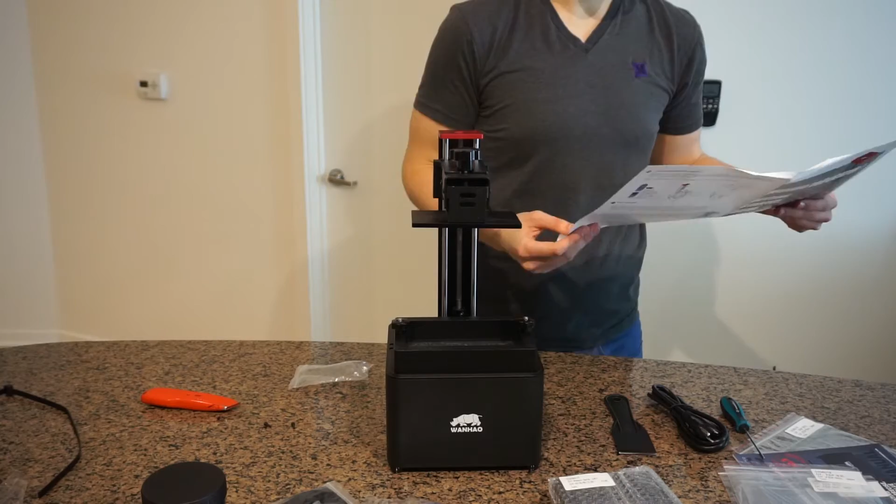Comes together very quickly in terms of the mechanics. Just checking over the manual, making sure I didn't miss anything and all parts were included. And the lid just fits on nicely, and I think it looks great.

One thing you need to know about these printers: they are messy, messy, messy.

So do yourself a favor and lay down some plastic on whatever surface you're about to work on. I'm just going to be using a trash bag over the top of my desk as a temporary fix for today, since I'm doing the video recording, but it'll save us down the line. A lot of mess can happen.

So I'm going to take my printer, put it on the plastic, and then we're going to start plugging in the cords, starting off with the HDMI cord. It is a display that's on the printer, which needs its signal sent to it through the HDMI from your computer.

Up next will be the power cord. You gotta have power. And then something that's not being shown is also the USB cable. Didn't plug that in here, but you also have it connected to your computer via USB, which is a USB B to A cord, provided with the printer. I'll take off the lid, set that off to the side so we can do all the work we need with the internals.

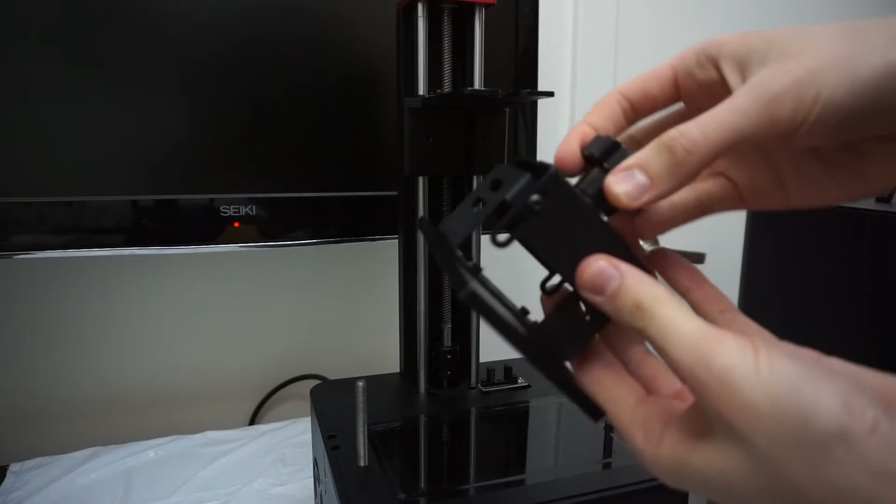Now we're going to start attaching our pieces, such as the build plate, which we are going to hook on to the printer's Z gantry, making sure there's a gap between the thumb screw and the build plate. That just slides into place and gets tightened down, making sure it's all the way back.

Up next, we're going to be getting the resin vat — this hunk of metal that has a plastic sheet attached to the bottom called FEP film. I'm going to first clean that off using isopropyl alcohol. We don't want any smudges on here at all. We want to make sure that it is spotless.

So I'm going to take my time, use a few different shop towel rags, and wipe it down really well. Once that is clean, I'm also going to take a second to wipe down the LCD display screen, just to make sure that there's nothing left behind there before I sandwich them together.

The vat just goes straight down onto these two threaded rods sticking up from the printer, and with two small thumb screws, it gets tightened down. We don't want to make it too tight — we could risk cracking the LCD screen — just snug, so that it's not going to wiggle around on us. Perfect.

Alright, so to get our life in order and get this printer set up, we're going to need to get our software together. Now you would think you would go to wanhao3dprinter.com and be able to download whatever slicing software you need for it. That's not the case, necessarily.

On the website, when you find your way and navigate to the product support for Wanhao Duplicator 7, you will find USB drivers to download if you have issues with your computer connecting. If you already have other drivers installed, say from working with Arduinos in the past, you don't need to worry about it, but you can find it here on the Wanhao website.

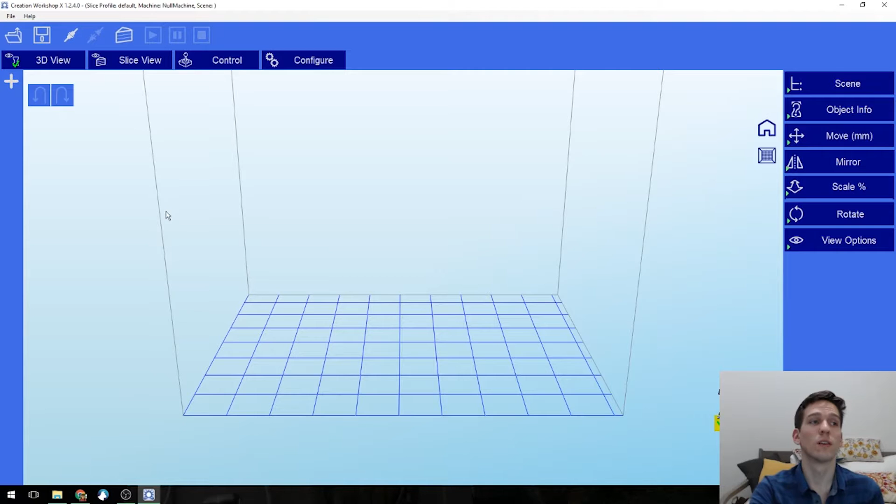And lo and behold, we have a beautiful Creation Workshop screen. We've got the build volume here. I believe it's already set the defaults for what the Wanhao printer is, but we'll need to go through a couple things to get this up and running.

Going over the configure settings, we are going to set up our printer with a new printer profile. I'm going to name this one D7 setup video since I'm creating it for the purpose of this video, but you can name yours whatever you want. There's a few different things that we'll need to set up in here. One thing is knowing that as I edit, I need to go back and make sure that I am in fact editing the one that I want to edit. And here we have a few things to adjust.

First, I need to configure what port my printer is connected to. In this case, it is communication port 4 that I know my printer is selected on. We do not need to control an X and Y axis. We do need a Z axis. We don't have any tilt controls or extruders or heated platforms to worry about. I do like to be able to control whether the motor is on or off. Entering manual G-code and controlling the projector are all things we want to keep.

Apply those changes. And whenever I do that, it's telling me I need to configure at least one display device. What that means is over here, it lists the two displays on my computer: display 1, which is the monitor that I'm working off of right now, and display 2, which is what the printer shows up as when it's connected through the HDMI port on my computer.

So to make sure that is set up, we're going to go to our display settings on our operating system. I'm looking at my first monitor - that's fine and dandy, that's still the same default, that's my main display. I'm going to go to number 2 and make sure this is set up where the resolution is maxed out at 2560 by 1440.

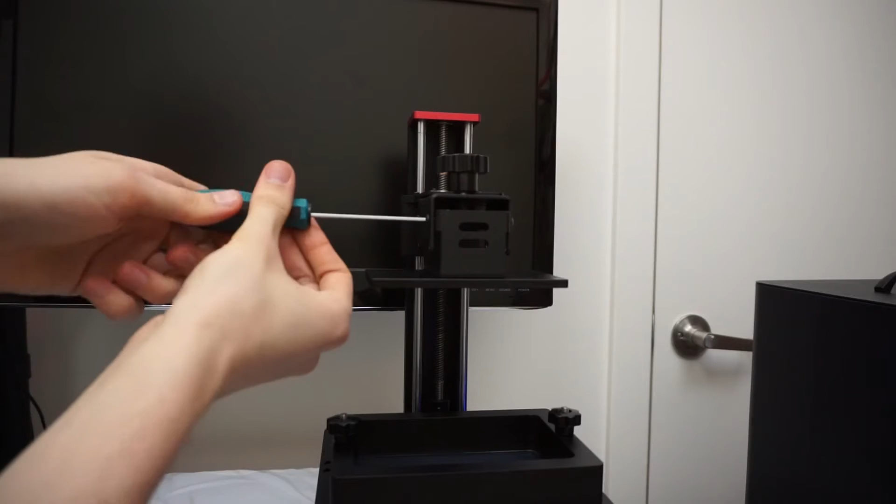Up next is making sure that our Z plate, our build plate, is homed to the proper position. Using the Allen wrench tool that came with the printer, I'm going to loosen all 4 screws that you would find on the gantry. This is going to allow the build plate to freely hang off of the Z gantry, so once I lower it down, it's going to get into position nicely since it's loosely hanging right now.

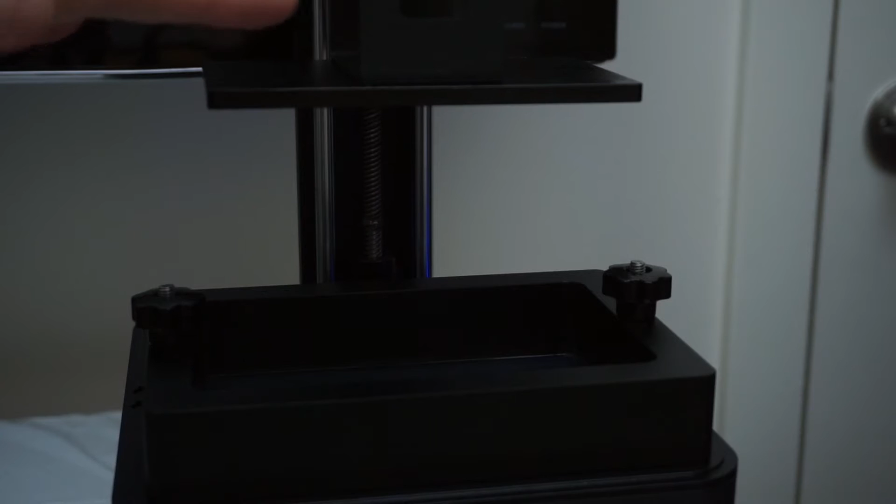So once it is loosened, I can come back to our Creation Workshop and hit the homing Z button right here, which will cause our printer's Z-axis to drop down until it meets the optical end stop point. Now with the printer going down on the Z-axis, it's going to bring the gantry to the 0 position, and with the loose build plate, it's going to make sure that it's sitting flat and level with the FEP film, and therefore also with the LCD display.

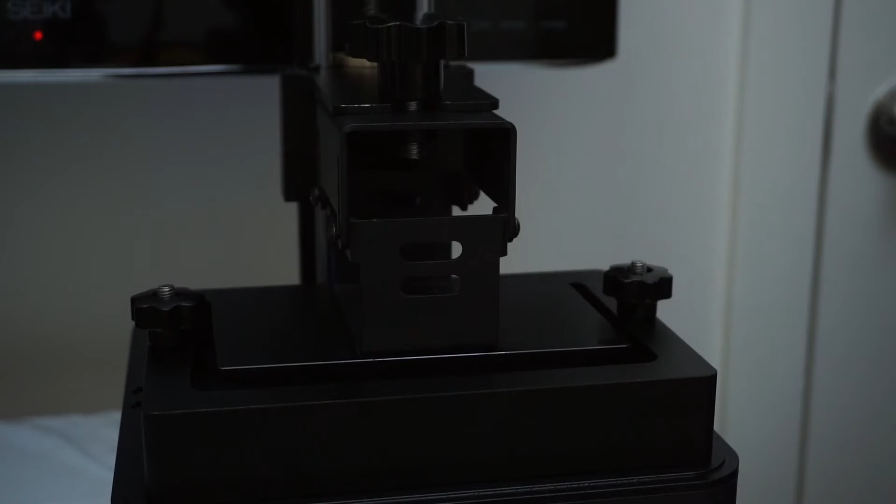Once it's lowered, I'm going to use the same Allen tool to tighten all of the screws, keeping some pressure with my fingers, pushing it down, making sure that it's flat and level with that build plate, just making sure everything's snug again.

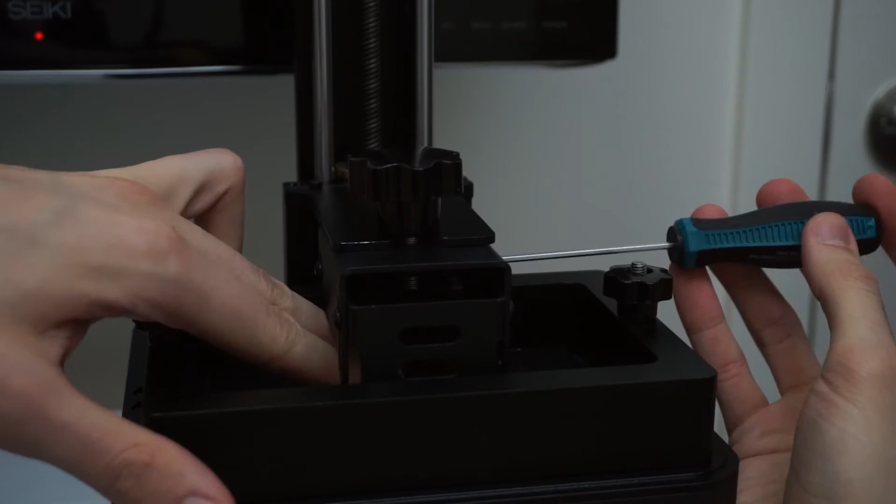So up next, before we get all gung-ho about pouring in resin and trying to get a model sliced and printing, we want to make sure that our printer works. To do that, we're going to use a couple G-code commands to make sure that our LED that's inside, our UV LED, that's the big powerhouse of the whole printer, is working.

To do that, we're going to be in Creation Workshop, making sure our printer is still connected, turning on manual G-code commands, and then there's really 4 G-code commands to worry about here. First, I'm going to turn on the internal cooling fan using the code M106 S255. What that's saying is it's going to start up the fan at 255, which is the maximum value you can set. I believe that has something to do with pulse width modulation commands that get sent to the fan - don't quote me on that. But we're going to send that, and it's going to turn on our fan printer.

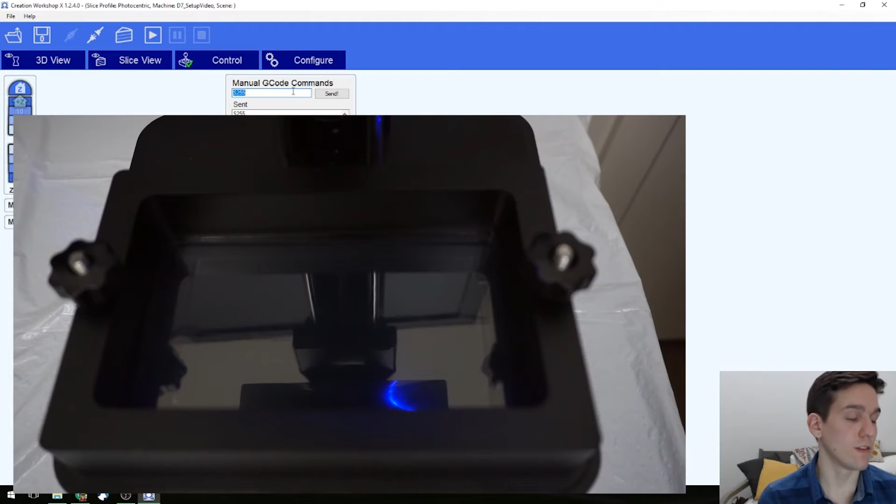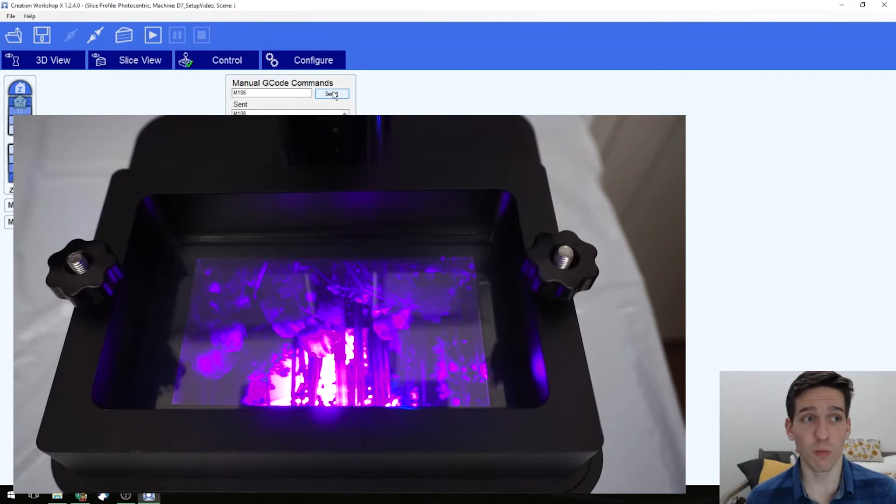With that on, I can then feel comfortable enough to turn on our LED by typing M106. That now turns on our LCD display. Now with nothing sent to this display, it is acting just as if there is a second screen on the printer, showing what the desktop of my second monitor would normally look like.

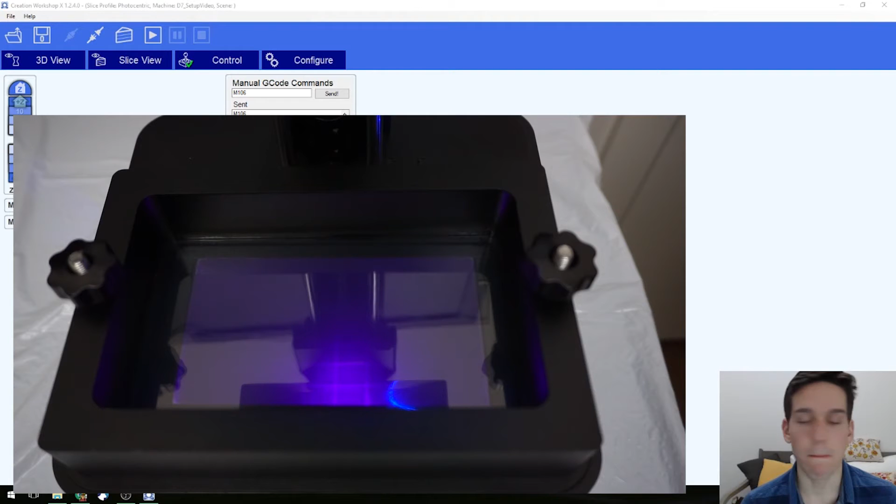There are a couple commands you can put in within Creation Workshop. Here I can show blank, which blacks out everything on the display, or I can show calibration, which might be too faint to see on camera, but there will be a small grid that shows up. Yep, we can see some parts of the grid showing up. It's very faint, but that allows you to see the grid lines of the print as it's going, and this tells me that it is working.

I can hide it, just show it like a normal display, or show blank. I know the LED is working, and now we want to turn it off. So we're going to hit M107 to turn off our light, and then we can turn off the fan as well by setting it to a power level of 0 with S0. Simple G-code commands, pretty much the only ones you'll need to worry about since we have the other controls within Creation Workshop, just to test our light before we start pouring in resin.

So let's get to that now. Let's pour some resin. I'm going to be using Photocentric Hard Red UV resin. I ran out of the Wanhao gray that came with my printer, so I only have this around, and it came in a bundle with my printer.

But before I get started, I'm going to first protect my hands. This stuff is nasty, it can irritate your skin, so I'm going to put on gloves, nitrile or latex, and make sure it's powder-free. I'm going to get those on before I ever handle anything with the resin. Once I'm back to using this printer regularly, pretty much everything around it gets resin on it at some point, and it becomes sticky and gets on your hands. It makes them smell, it's not great. So just wear gloves.

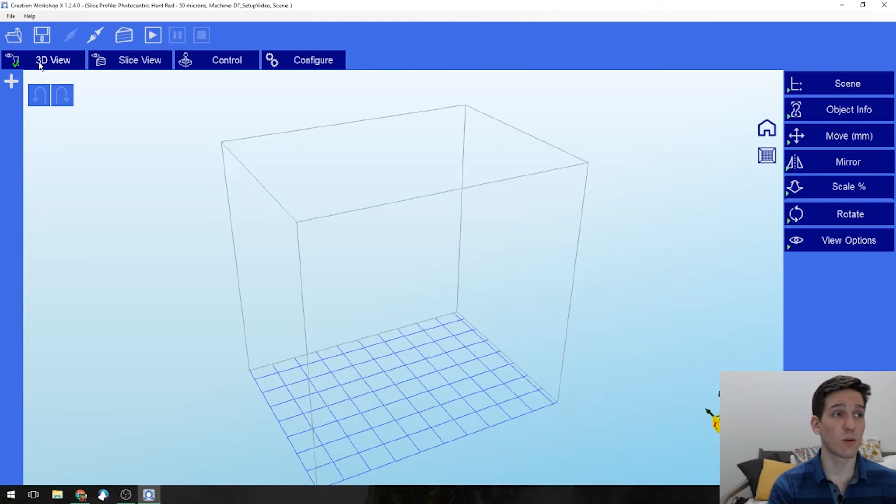To find that part, we're going to go to Thingiverse for a wonderful calibration piece. We just search for SLA test model, it should pop up - boom, first one right here. This SLA test model has all these intricate details that let us really see the capability of this printer. It has very small details that print on the top, so we can see how it builds up layers. It also has very narrow structures that allow us to see how delicate of pieces it can create.

These sections show you how much gap you can get between two pieces, in terms of if you're trying to have a part that prints in place or something like that. You can get an idea of what your spacing needs to be before the two sides fuse together due to over curing, which is what we want to limit.

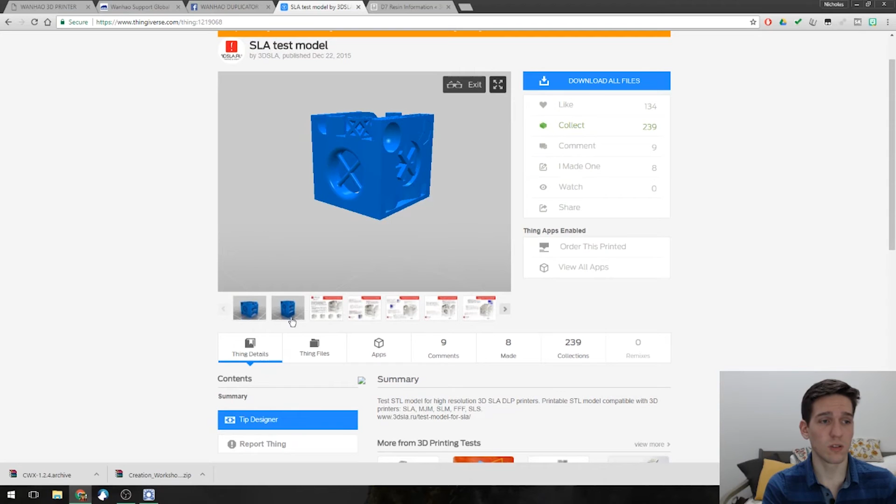Also, you have the whole cube itself, as well as some other random pieces to check for dimensional accuracy, so it's a great model. That's what we're going to use. It also has one listed that has support pieces already built into the model, which is what we're going to use, so we don't have to worry about the bottom of the model having issues when we first do our print. So we're going to download this.

We will come back to our workshop and open up this file from our downloads folder, and it's small. That's another nice thing about this part, is it's small, so it doesn't take too long to print. All right, so we have this here, and then all we need to do is tell it to slice it.

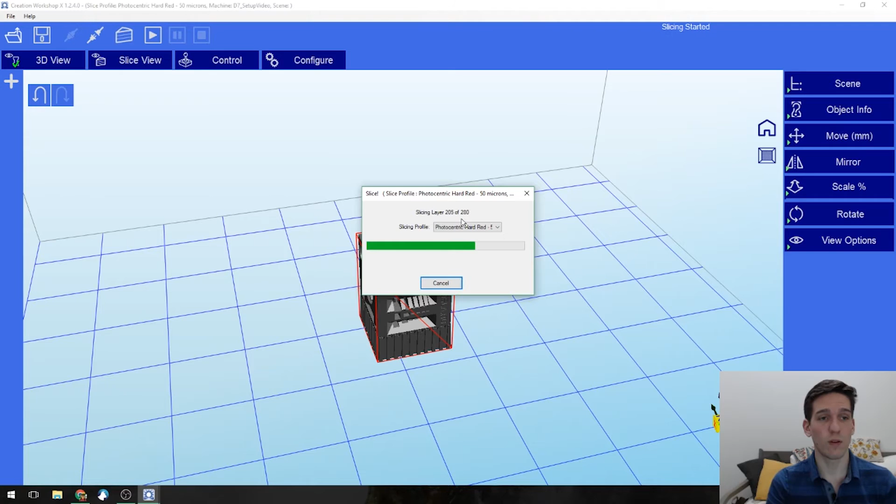I want to make sure it's using the Photocentric Hard Red 50 micron layers profile that we've built before. It's going to go through the model and slice it up. It's going to create 280 layers, because this model is tall enough where there's going to be that many layers. It's 14 millimeters tall, so it'll make 280 layers because each one is... no, I'm messing all those numbers up.

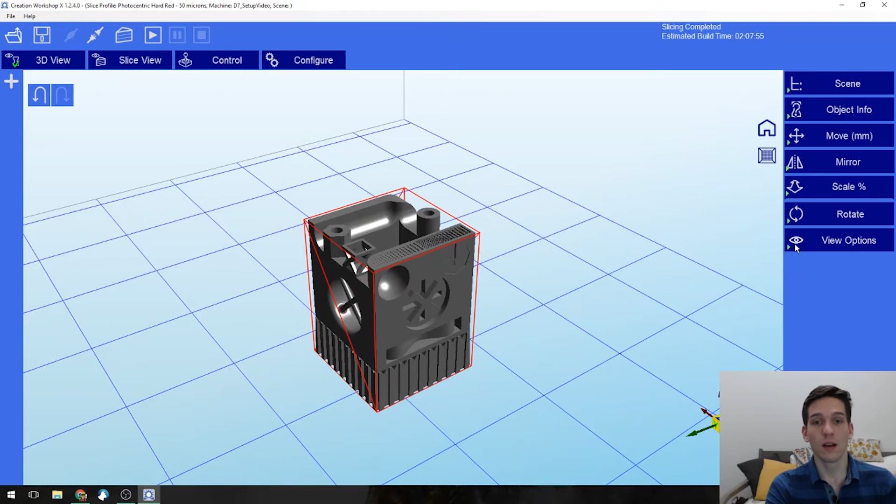Ignore my math, I'm messing it up. But so that's sliced. If you want to get an idea of what it looks like in each slice, you can make the model somewhat transparent, and then we can also show the slice preview on the screen.

When we go to the slice view, there's a couple ways you can see every slice, and this is what it will appear as on the screen, on the display, on the LCD of the printer. That's what it will look like. You can also see the G-code itself if you want to scroll down and have a nice reading.

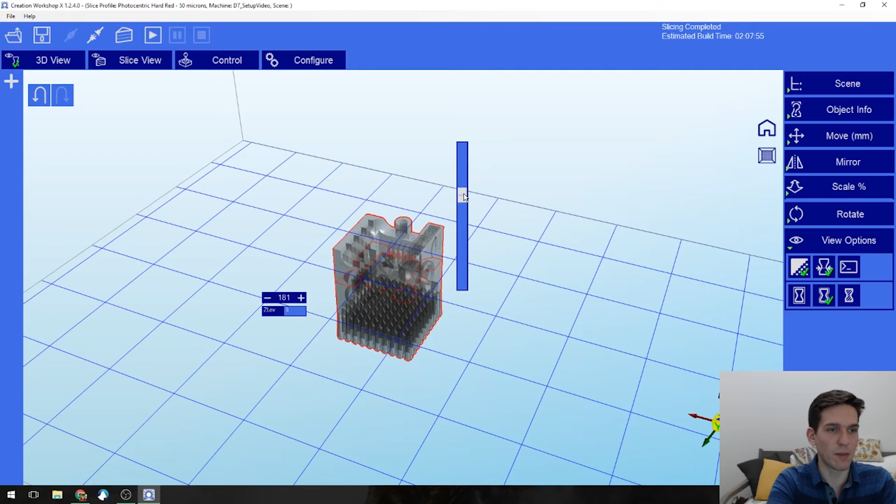Or over here, we want to show the slicing on our 3D view. There we go, now we've got it showing up here. You can see the slices coming through the model, and we want to make sure things aren't going to have overhangs or start printing out without any kind of support material off to the side. So you can just see everything that prints using that preview. So this is sliced, it's ready to go.

One thing we need to do is make sure that our printer is home, so we can click the home button one more time.

Oh, and now that I think about it, there's one more thing we need to do within our slicing profile. Every time you make a new profile within Creation Workshop, this is a very important step. Every time you create a new profile, the default G-code is messed up. It's missing the parts where it actually tells it to turn the LED on and off, which is unfortunate and frustrating, but it's just something we need to fix. So I'll leave copies of that in the link in the description below, where you'll be able to just copy and paste over these G-code commands. You can work off of them and we'll get that ready.

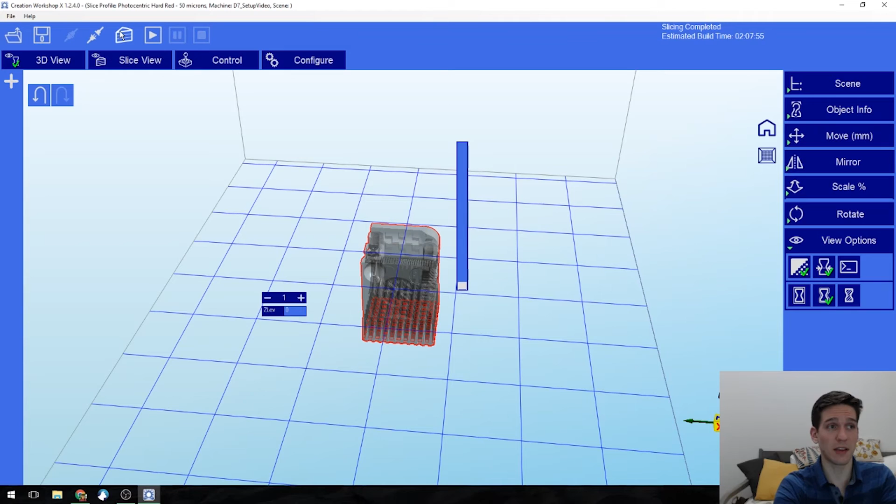So we have our model in place. I just changed things in our slicing profile, so I'm going to have to re-slice our model. That shouldn't take too long since I already did it once before. So it's going to slice this model, it'll be ready to go, and then we'll be ready to start printing it.

So as soon as this is ready, I'm going to go over to the control, home our printer one final time to make sure that the build plate is sitting down onto the surface. And I'm going to hit play. And then we will be off and ready to go. It will begin the printing process by turning the UV off and on as it prints. After every layer, it's going to raise it up, and it is going to be a beautiful process.

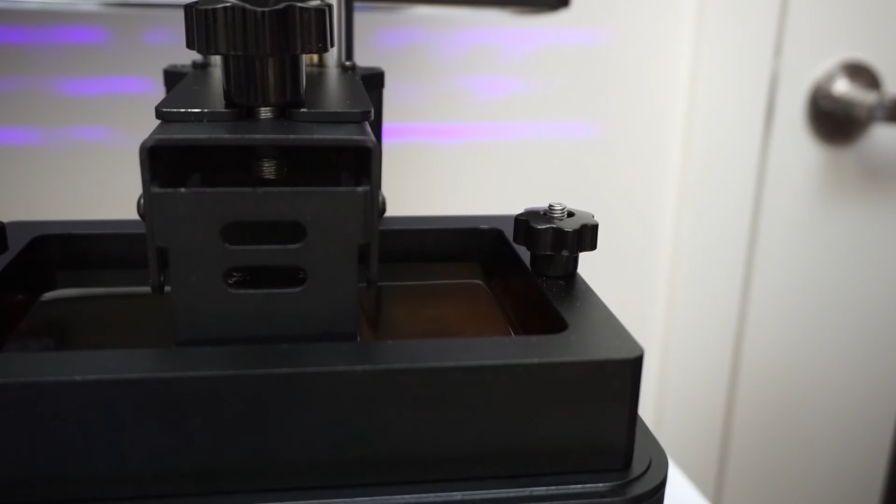All right, the print is coming up. Let's see how it did.

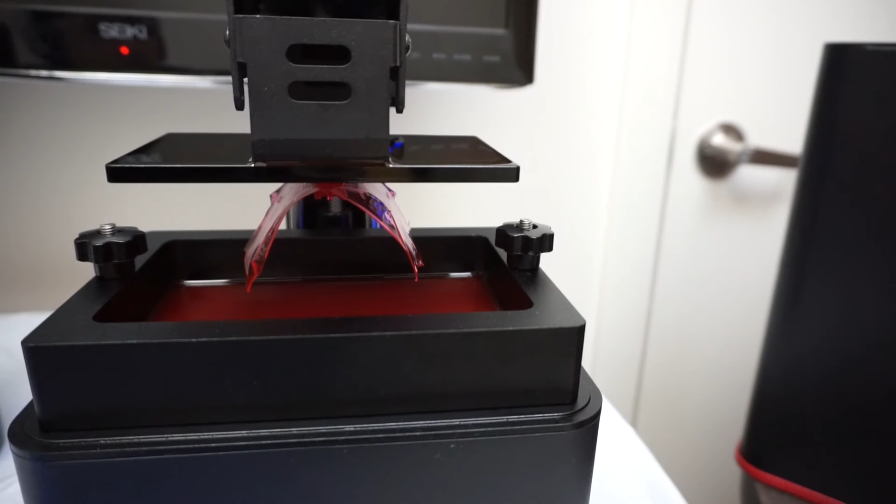Oh, what are we looking at here? Okay, so the part's there, but a side effect is that I think at some point a screen popped up on the second display from some software I had opened, which caused it to cure an excess bit of resin.

Good thing this is just a test print. Not a big deal. I'm going to take off the build plate, loosening that knob at the top, and allow the excess resin to drip off back into the resin vat. Since the resin isn't 100% cured when it comes off the printer, I'm just going to peel off this wasted resin plastic film, so we can get a better look at the model itself.

Make sure all the resin drips off so I don't make a mess. Let's see if we can get a closer look at the model itself on the print results. The camera is not focusing. It's a really small part, so I don't think I'll be able to zoom in enough and still focus. I think we'll have to change things up a little bit.

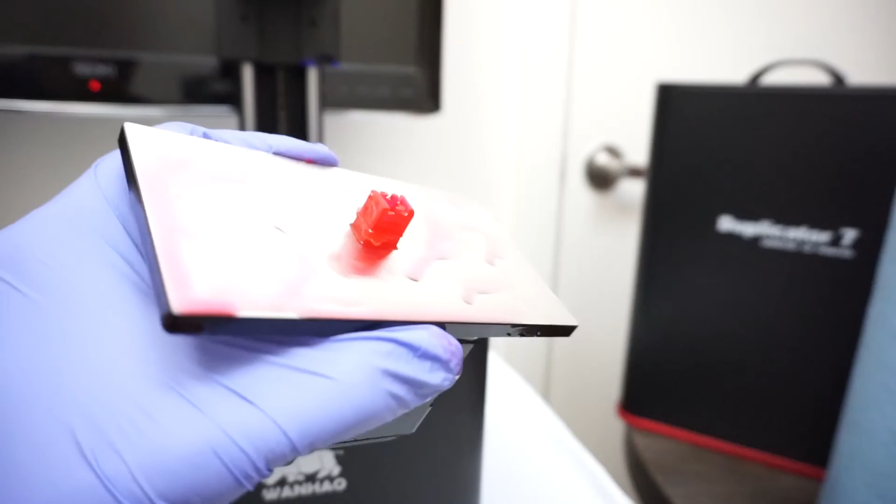But there's our part. I'm going to pop this off the build plate using the plastic spatula that came with the printer. It's got a small surface area, so I'm just going to push it and it pops off. Perfect. I'm going to put the build plate back on and we can take a closer look at this right after we rinse it off in some IPA.

Isopropyl alcohol is going to dissolve the excess resin that is on our part, and we'll be able to get a better look at it.

Here I have a small container filled with isopropyl alcohol. I'm throwing my part in and swishing it around to have the excess resin dissolve into the alcohol. Not going to be too thorough about it since this is just a test part, and I already know there are some issues with it, like that extra layer of resin that was cured due to user error.

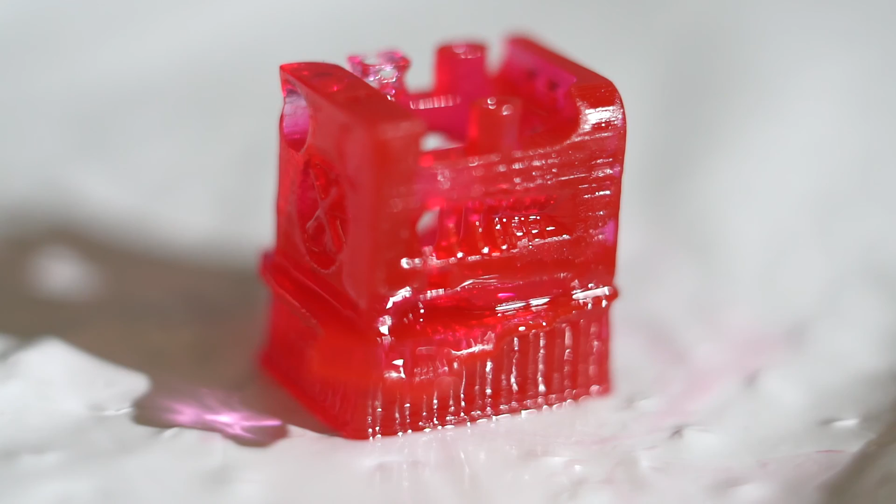Once this dries off, we'll be able to take a closer look at all the details. And here's the part. I even had to hook a macro extension tube onto my camera to try to get these shots because of how small this is. It's incredible what this machine can do.

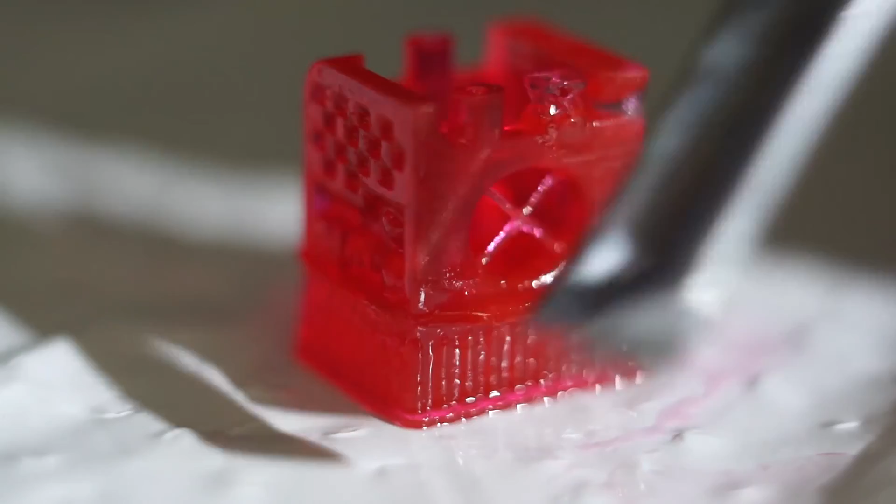Here is a part that shows incredibly small details. Look at the small X's in the middle of that, as well as the X's in the top piece there. And this is without any proper calibration for this resin profile - this is me just finding some random numbers online and seeing how it went.

Every printer is a little bit different, so they'll all require some kind of calibration for whatever resin you're using. But I'm still amazed every time I pull a print off this printer at the quality it can create for such a low cost.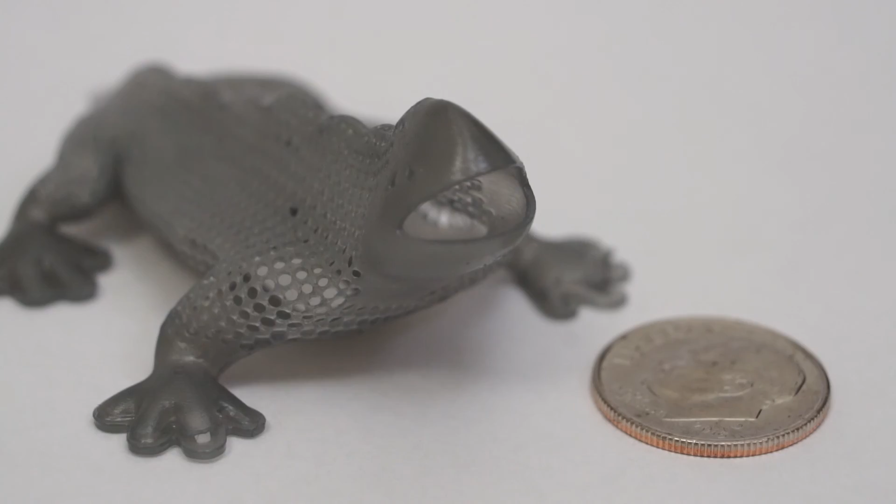As a treat for sticking around to the end of the video, here are a few shots of parts that I was able to print using the Wanhao gray resin that came with my printer. Just a few random odds and ends, bits and pieces that I thought turned out really well. Little to no post-processing on these, just removal of support material that might have been there. I really liked how they all turned out, and it just shows what amazing things this printer can do.